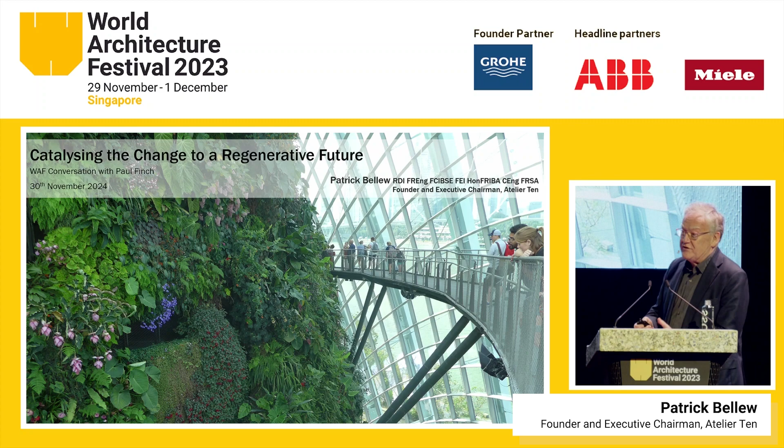So I'm going to talk about catalyzing the change to a regenerative future as a broad title. I started Atelier Ten in London in 1990, working alongside Atelier One, our structural engineers. And as Paul said, we were working in a world where, honestly, the architects designed the buildings and we put services in to make them work. And we were trying to find a way of having a conversation between architecture and engineering that improved the way that buildings were built. Now, this may seem blindingly obvious now, but back then it wasn't so much.

We've now grown to be about 350 people in 11 offices around the world, working on lots of projects far and wide. I'm just going to focus on a few of them today. But in terms of talking about catalysing change, I'll start with an anecdote about an Irish client I had, working on a project with Foster & Partners.

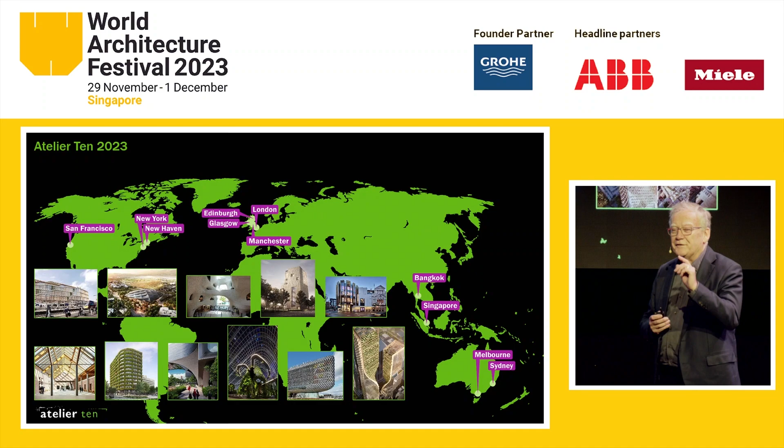And we had a meeting talking about innovation. And he took me aside after the meeting. He said, Patrick, I want to be innovative. I just want to see where it's been done before. And so you get this thing about innovation and about change that is often, you need to have people who help you to move ideas on.

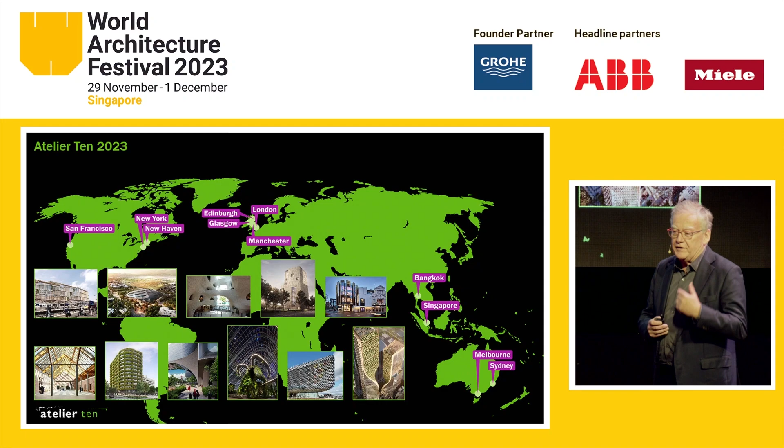And I'm going to talk a little bit about our sort of journey through gradually embedding sustainability into projects, and then about how we move what's happening now in terms of carbon and what's changing. So actually our first project in Singapore was with Michael Wilford, doing the Durian building, the Esplanade. We worked with Atelier 1 to design the shading system there.

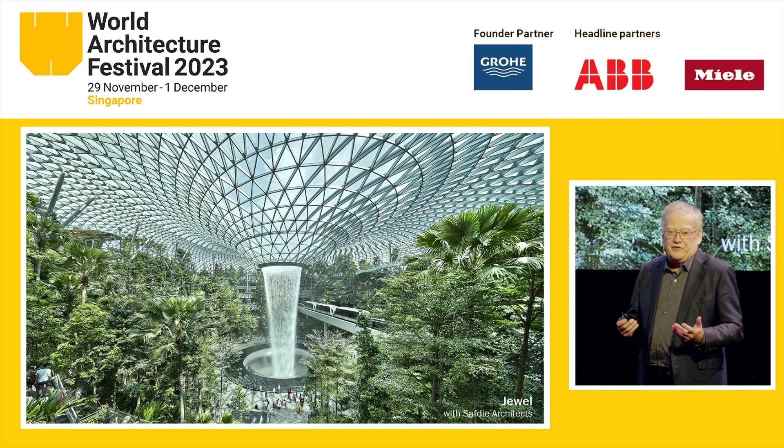The Gardens by the Bay I'm going to talk about later. We also were the environmental designers on the Jewel, working with Safdie Architects. And as Paul says, we're still here in Singapore working on things like Clarke Quay and many other projects at Sentosa. So we're very busy in the Singapore market, and it's a wonderful place to talk about regenerative design and about the future of design, because the city is all about that.

But as a business, we've had a kind of 35-year focus on operational carbon. Really, what we've all been talking about in this whole time is about operational carbon. And winding the clock right back to the beginning, we did some fairly simple little projects where we were exploring different ways of doing things.

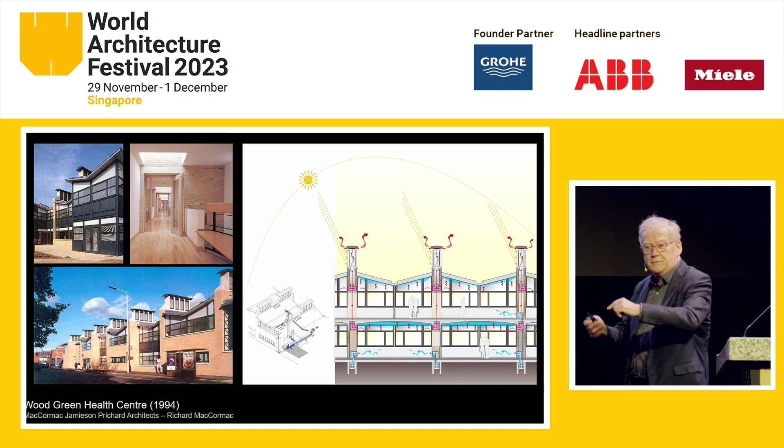This was with Richard MacCormac, a little health centre in North East London, where the whole building was actually designed around these ventilation stacks, doctors' surgeries where we could bring air in from a quiet courtyard through an earth duct underground into a little doctor's surgery. He could open a little damper and the air would disappear up a chimney and would naturally ventilate without opening the windows because it was a noisy street outside. So early explorations of natural ventilation.

Working with our collaborators of 30 plus years AHMM, figuring out how to do schools as Britain went through a phase of building schools. This was a sustainable primary school where we started to understand that actually with schools you don't want to build heavyweight buildings. You want to build lightweight buildings because schools are only occupied for a relatively short part of the year. They're very rarely occupied in the summer where thermal mass might be a help to you. So what you want is buildings that are pretty responsive, that have great natural light, that naturally ventilate very well.

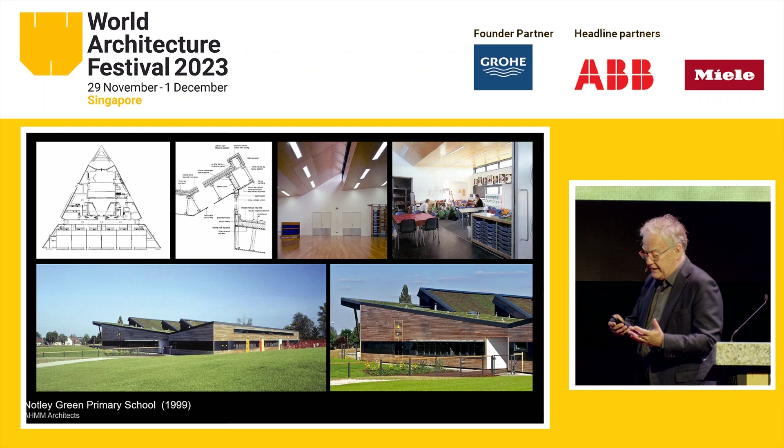And this is a really iconic little building that, I think Paul's in the audience and will remind me, I think we won about 11 or 12 awards. And the British government being what it is, they never replicated it. It's one of the most successful primary schools ever built, works absolutely beautifully. Still, all made of timber, it's completely sustainable. It's years ahead of its time, and yet never done again because of our procurement system in the UK schools business, madness.

We got into thermal mass for university buildings. This is the building with Eva Jiricna and Jon Tollit at De Montfort University. They were really into natural ventilation, and we said, no, when you've got buildings that are full of students and heat, we should be harvesting that heat through the winter and storing it in the concrete structure. So we developed this system using a system called thermodeck, where we pushed air through the concrete slabs and used that to provide our heating and cooling in a building that needs almost no other systems.

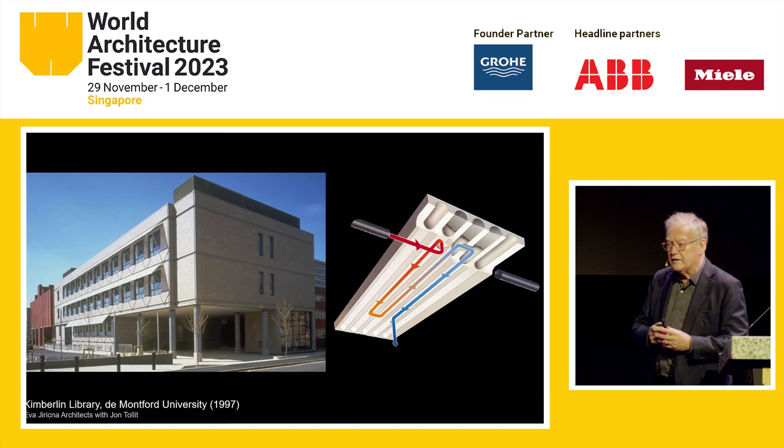I'm not going to go through these in detail. I'm just going to give you a flavor of where we were taken. We started to get into in-ground storage. So this is working with Rick Mather at the Sloane Robinson building. The late Rick Mather was a very frequent collaborator. Geothermal buildings that put energy into the ground.

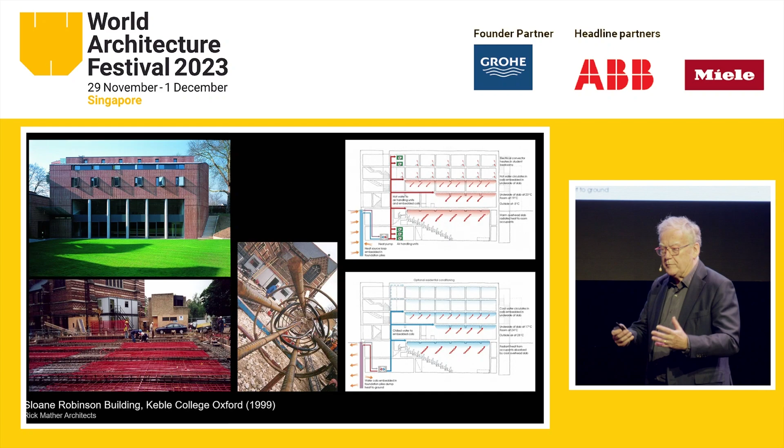And then a real transformational moment, working with Feilden Clegg Bradley. Congratulations on the Kigali win yesterday. We're working with them on that too at the moment. But this was nearly 30 years ago at a place called the Earth Centre. It was going to be the UK's Centre for Sustainability, a building by Future Systems up at the top, but the building with Feilden Clegg Bradley is here.

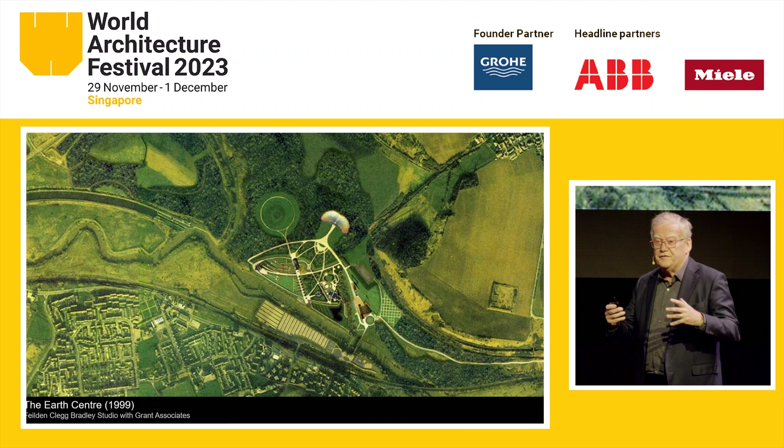The site sits on a colliery spoil heap, and it straddles two fault lines. So we were the structural engineers for its 30,000 square foot building called the Planet Earth Gallery. We're going to build a giant raft, a huge, deep raft to basically carry this building over the top.

I did some sketches which I faxed to Peter Clegg. This is how long ago it was. I remember faxing them to Peter and saying, hey, what about if we hollowed out all the floors underneath and built something that became known as the Labyrinth? Could we find a way of doing sort of the heating and cooling with this sort of underground system?

So we developed a graphic to try and explain it. It was one of our first kind of graphics that we produced at Atelier 10. And being a British lottery project, we had no money at all to do it until the day they gave us the money, and then they said, you've got to start on site in 2 weeks.

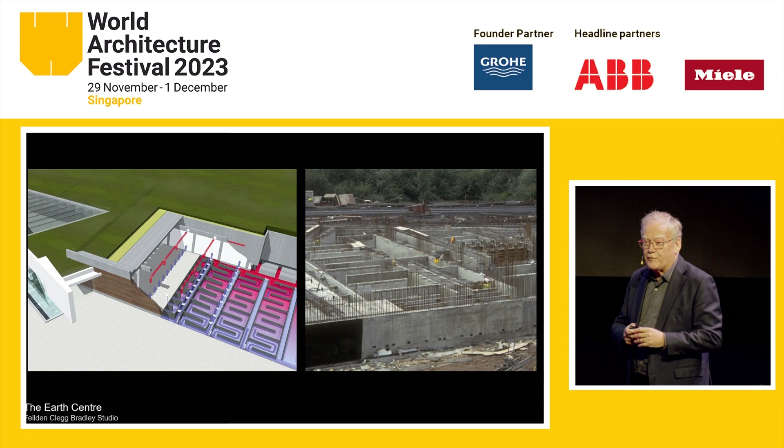So we basically looked at the client, and the client looked at us and said, is it going to work? And we'd done sort of 2 pages of calculations and thought, yeah, it'll work. So we got on and built it. And so the first labyrinth came out, and this is the innovator part of it, where you're being innovative. This had never really been done on this scale before, probably since the Romans. But it set in motion a whole series of projects that we worked on down the years.

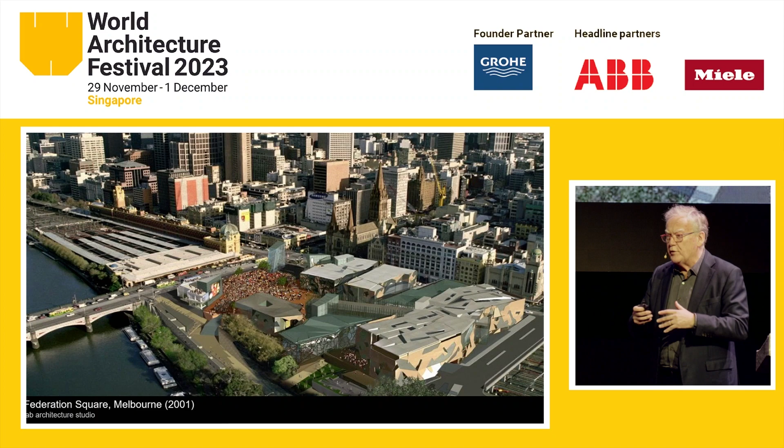So Federation Square in Melbourne with Lab Architecture Studio. It sits over the rail tracks going into Melbourne Station, and there was a big piazza here, and we had to condition a long atrium space, 350 meters long, that's got an auditorium at one end, but it's completely open at both ends. So putting normal air conditioning in didn't seem like the right thing to do.

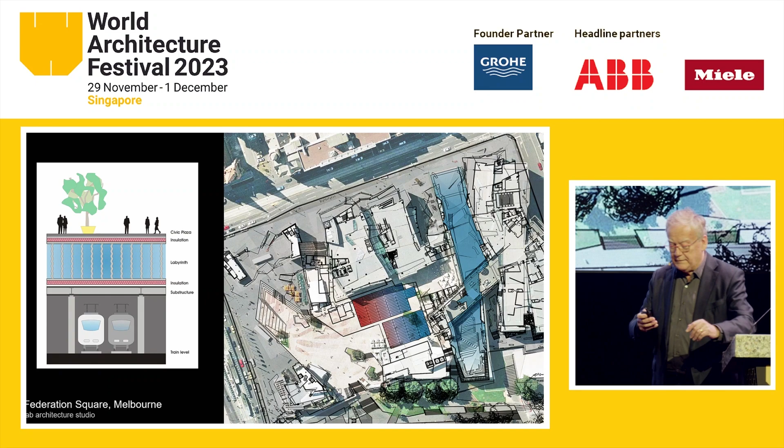So sitting over the train tracks, we had this space that was between the crash deck and the Civic Plaza. And so underneath, we postulated the idea, could we put a big labyrinth under here that could do our passive cooling? So we did. Another one that got through, the client said, yep, they funded it, and we would have had lots of materials in here anyway to hold the deck up, but we did add quite a lot more.

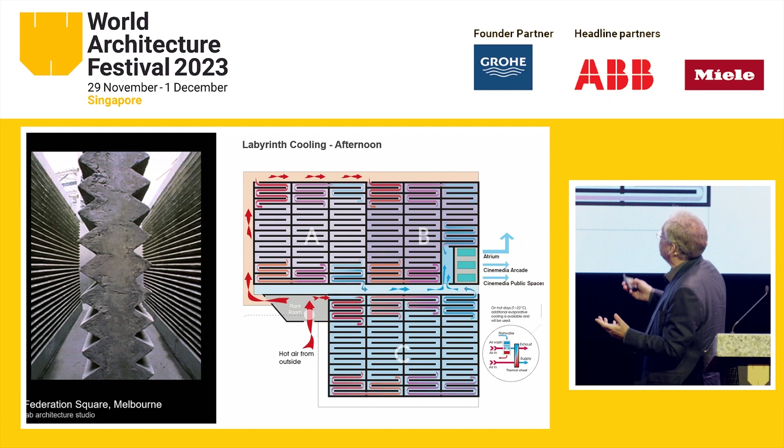The air travels about 1.2 kilometers down tunnels, and basically the idea is that we take cold air at night, so it's almost always cool in Melbourne in the evenings. Cool air basically cools down all these banks of cells. So the following day, we pass hot air through, and that hot air chills down before it comes into the space. And the resulting temperature, just a quick physics lesson, this is temperature, and temperature over time is energy. So basically what you're doing is taking the cool from the outside air and storing it in the concrete, and that gives you the ability to level out the temperature changes.

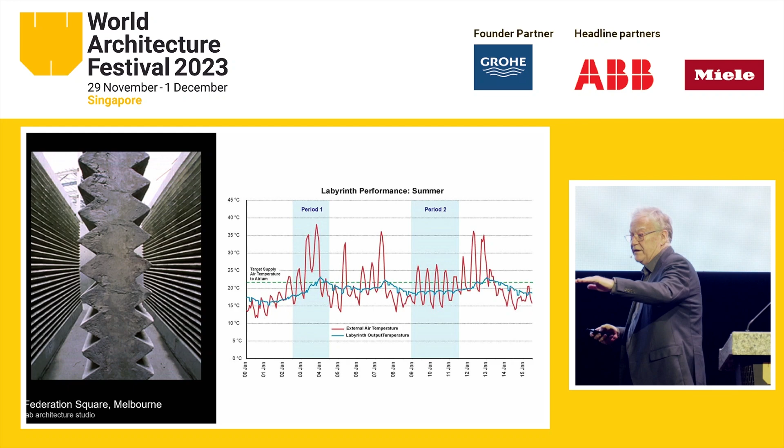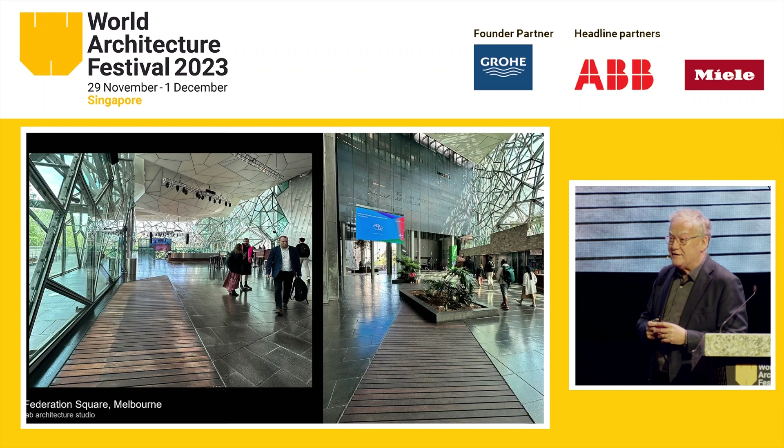I had the great good fortune to go back there a couple of weeks ago and met Peter and Don, the 2 architects, down in the labyrinth. We had a guided tour of the labyrinth with this very excited guy who manages it, who took on the job of head of facilities at Fed Square because he wanted to work on a labyrinth. He's called Colin, he's fabulous. And he gave us a fantastic tour through. I would share the videos, but I don't have time, and it's just tunnels. It's miles and miles of tunnels.

He said it's a bit like being in charge of a reactor on a nuclear submarine. There's basically nothing to do. You sit and look at it and just hope it doesn't go wrong. But so far it hasn't gone wrong, which is great. So 21 years in, climate change has made the temperatures in Melbourne quite a bit higher. But actually, this thing is proving very resilient. It still does all the cooling that we need right through the year.

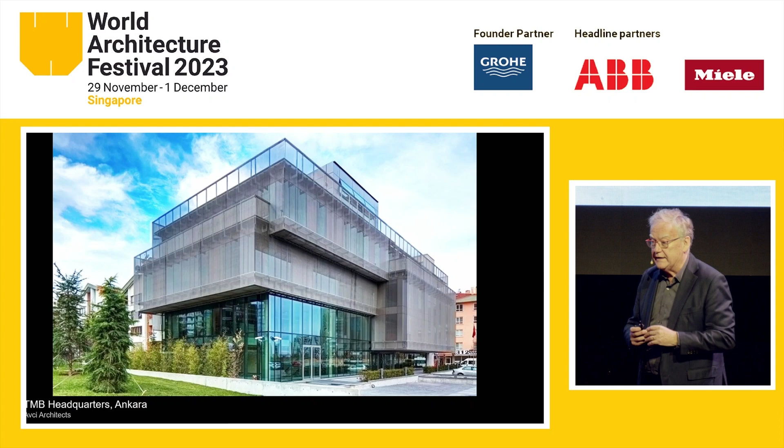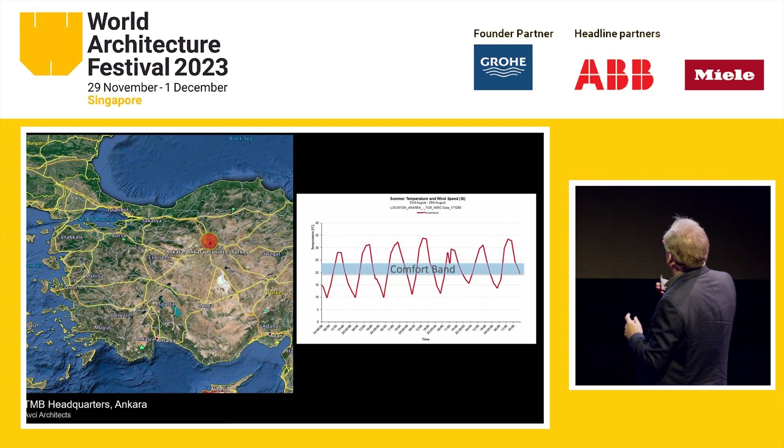We took the idea to Ankara, its headquarters building with Selçuk Avci, who I studied with at Bath. Ankara is also a place where you get these big variations in day-night temperature. And then in the middle is the comfort band, so again, energy into storage.

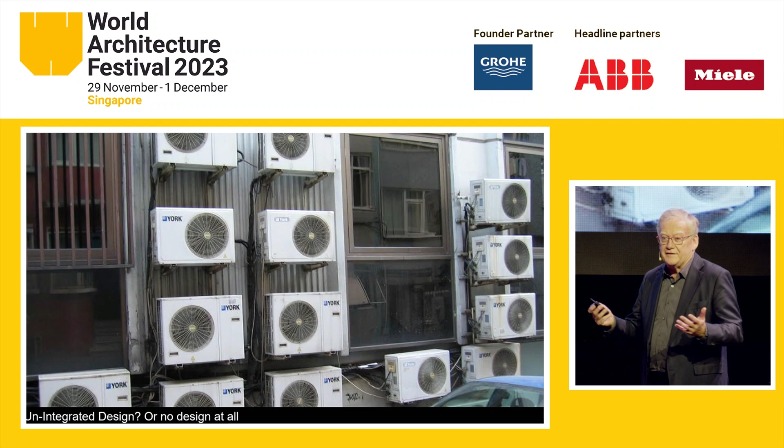So we persuaded this contractor who were building the building not to do the normal thing in Ankara, which is just to plaster the outside of the building with chilling units, but actually to build a labyrinth in the basement, to do some slab cooling, and to do all the things I was sort of talking about. And they said, it's the Turkish Contractors Association, let's build this thing.

And so we built another labyrinth under here. We put slab cooling into the slabs. And the result was, instead of a building which is plastered with refrigerant-based systems, we have PV panels on the roof that run a small blast chiller, and everything else is done with the kind of day-night storage systems. So these things are about trying to shift the way people think about buildings and building design.

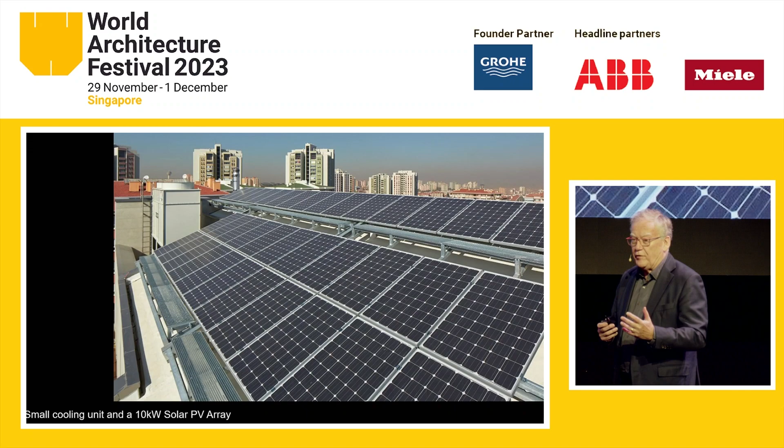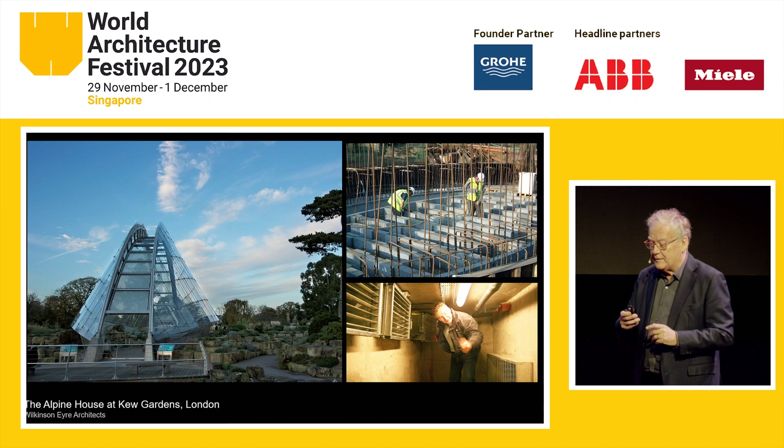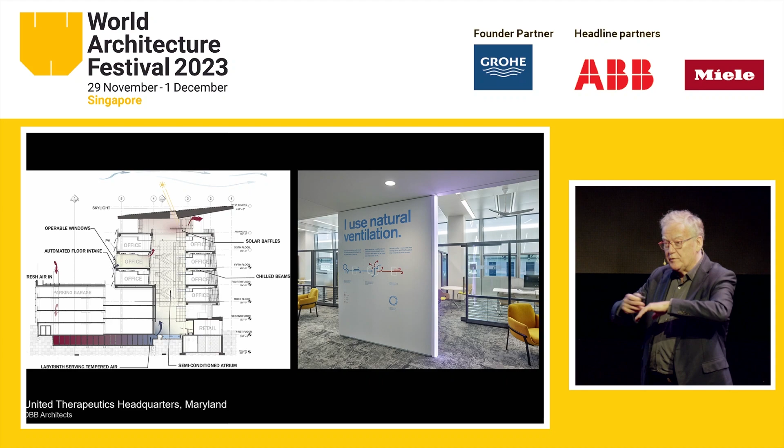And we've even done labyrinths at all kinds of strange little structures. The Alpine House at Kew Gardens with Wilkinson Eyre has a little incy-wincy labyrinth underneath, which you can just see on the top right, the guy's building. Building for United Therapeutics in Maryland, a net zero building we've done with DBB Architects, has underneath it all a large underground energy store, which basically cools the air going into the atriums. Then they open the windows and the air pushes out into the space. So this idea that started as one thing has turned into many other things.

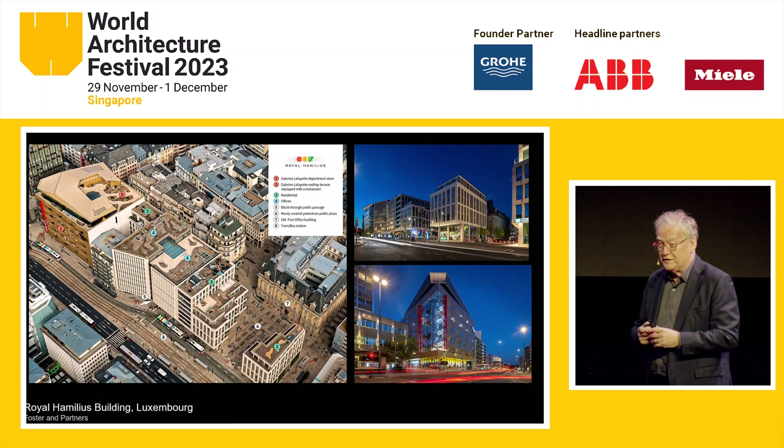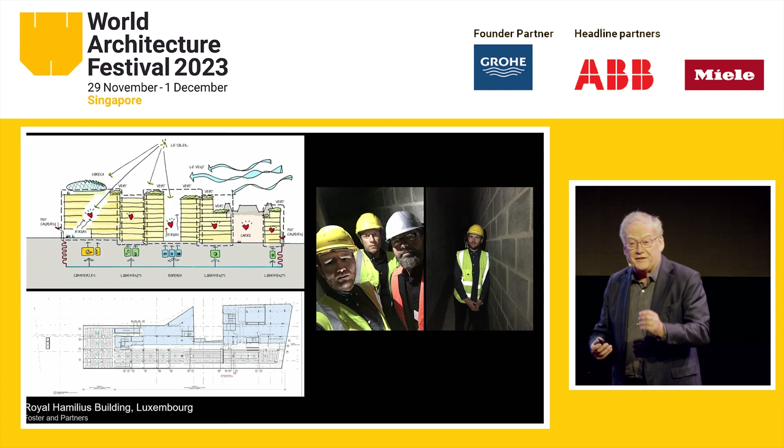They've put a big labyrinth underneath this, a whole sub-level, which is all these air passageways you can just about see on this drawing here. And some pictures of the guys from Foster's in the labyrinth testing it out just a few weeks ago as it's commissioned. So it's still rolling. 25 years later, that idea is still running. But I just use it as an example of how one can catalyze change.

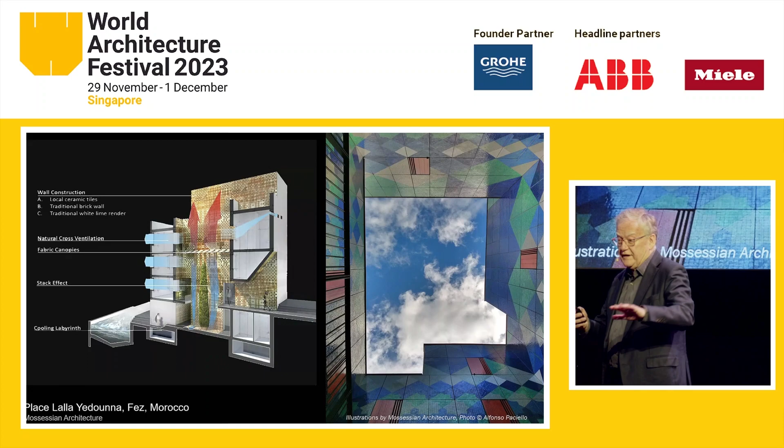Another project we've recently got photos of is a project by Michel Mossessian, the Place Lalla Yedounna in Fez in Morocco. This is in a World Heritage Zone, and we've done a sort of a rework of a big part of the souk in Fez, with some new buildings with courtyards, beautiful ceramic for additional cooling in the courtyards, but again with small labyrinths that sit underneath the buildings so that the air that comes up into the artisanal workspaces is cooled and conditioned before it comes into the space.

So all of that just gives you an idea of projects, of an idea that's grown and grown and grown and started to become part of our vocabulary, but also is highly intensive in carbon. Building these things takes carbon, and it's something we've become much more aware of as time has gone on. We've tried to do other ways of doing it.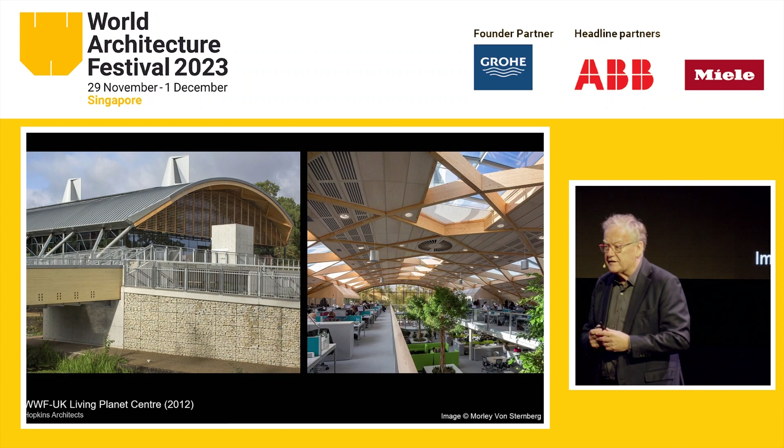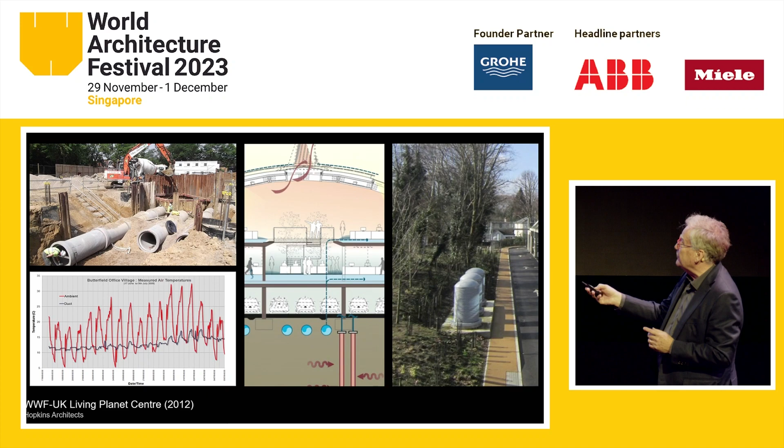So this WWF building with Hopkins in the UK a few years ago uses a slightly different technology where, instead of labyrinths underneath, we use concrete pipes in the ground. So these are called earth ducts. And these are the tubes. And so that uses the thermal mass of the ground to help us cool the buildings down. And again, we've got this graph that shows the resultant temperature: even on hot days in England, which do happen, 32, 33, we get air off the earth ducts at 15, 16 degrees. So again, free cooling, and it helps us to cool the buildings.

So this is part of the challenge: even when you drive all the loads down, the plug loads you still have in the building, running the power systems, running all those things, still need a whole lot of energy to make it work, which remains our problem.

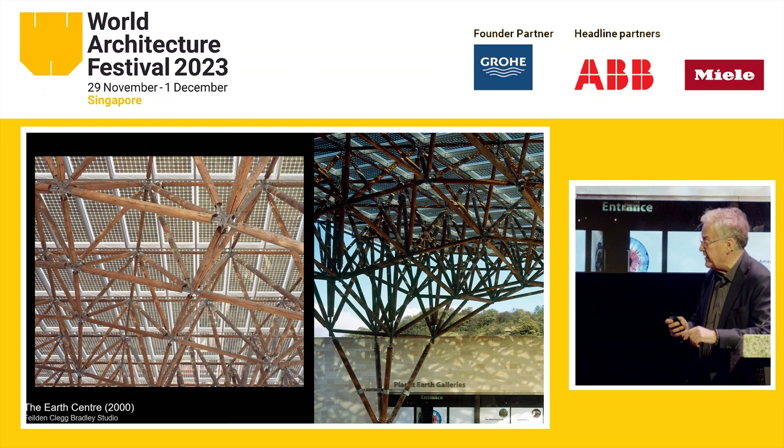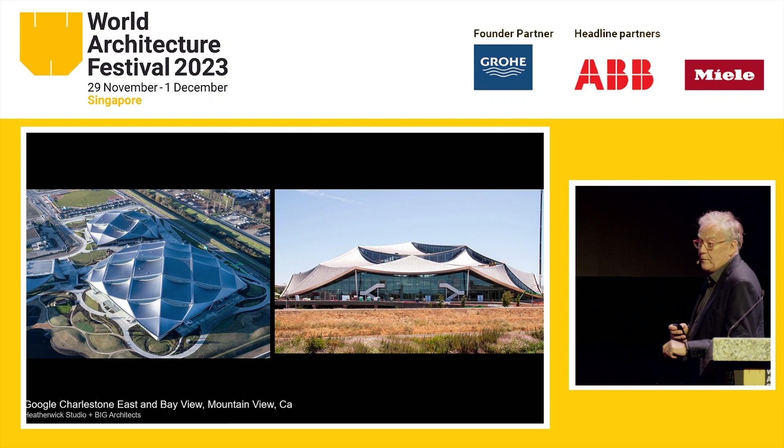And then more recently with Heatherwick Studio and BIG, we took the idea of these big domes that they have for Charleston East and Bay View in Mountain View for the new Google headquarters. And this is a completely PV roof made of shingles with a sort of 7 megawatt power station effectively on the rooftops of these buildings. So renewable energy is becoming much more a part of the question about how we integrate energy into the buildings.

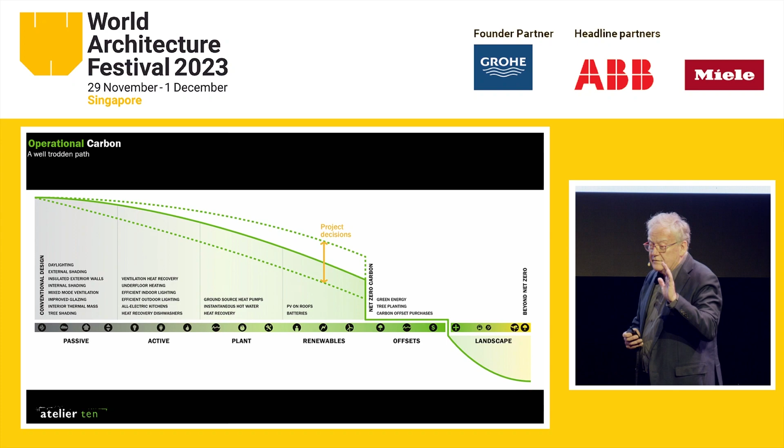So that's operational carbon. We understand the components of a journey. We've been on a journey. Operational carbon, driving carbon out is about passive design, active design, plant and kit, and then a bit of renewables, and then you get to somewhere on this point where to get to net zero, you're probably buying green energy, tree planting, other kinds of offsetting. So we kind of get all that now.

But with the emphasis on climate change, things have really, really changed. We have to wake up to a pretty big issue that faces us as an industry. The IPCC report says that urgent climate action can secure a livable future for all. But it projects a series of trajectories, a narrowing window for us to take action to reduce carbon emissions in buildings. And this graph basically shows what happens in various different scenarios, how we adopt carbon reductions in buildings.

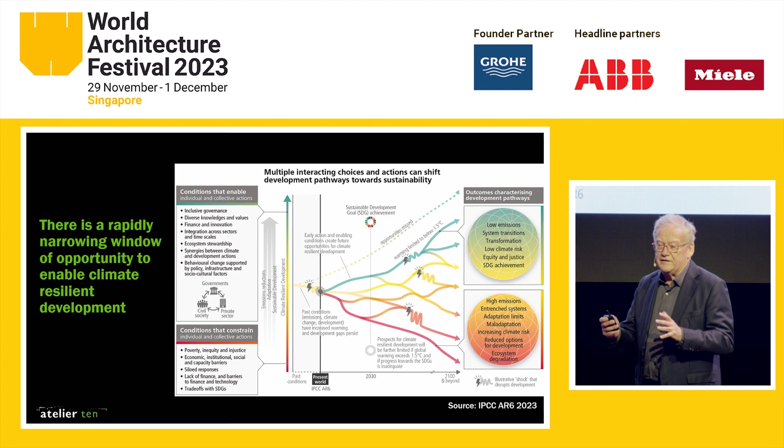2030, 2035 is our target date. This is not a long way off. And in terms of buildings, it's about the now carbon that's becoming the big issue. So the embodied carbon is the biggest story in town right now. And we don't often recognize the relationship between embodied and operational carbon in the decision-making processes that we have in building design. So embodied carbon is the carbon that's emitted when materials are made, transported, and assembled. So whether that's making cement, making steel, making aluminium, you basically produce carbon when you do that.

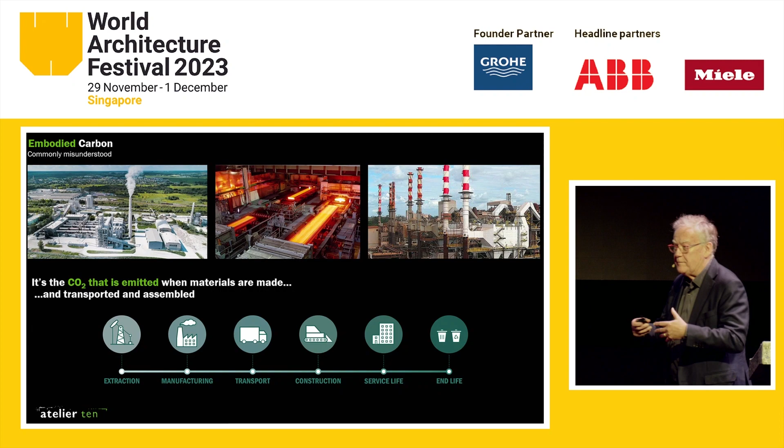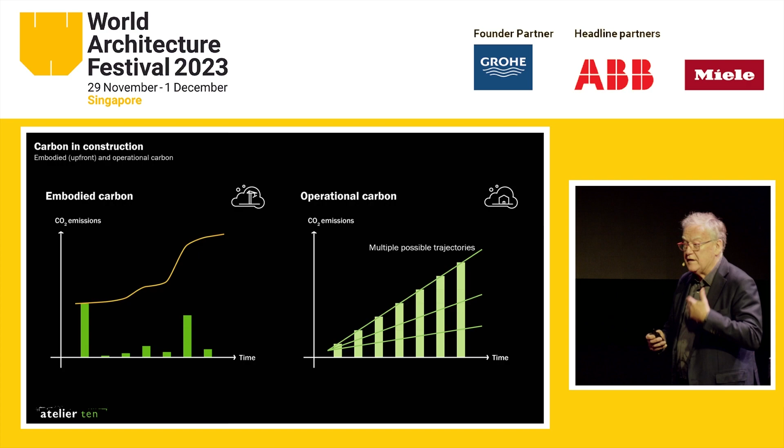You don't produce carbon when you knock a building down and crush the concrete. It doesn't give off bubbles of carbon dioxide. The carbon dioxide is made by the replacement materials that we put on site, hence the push against demolition. So if you think about the carbon over time in construction, you get these kind of graphs. So with embodied carbon, big amount of carbon up front, that's between now and 2030. Some more as you do fit-outs, maybe a big refit in 25 years. So you get a profile like that. With the operational, there are multiple possible trajectories depending upon the decisions you make, but effectively it's a longer-term game.

Now what's really changed, particularly in the UK, is our grid, the amount of carbon in the grid, which is what becomes the operational energy in the buildings. Okay? So the grid since 2013 has reduced from about 550 grams of carbon dioxide to less than 200 in 7 years. So we've had this amazing change. So if you use a heat pump to drive building heating and cooling, your carbon emissions are actually very low. Do you know that in a typical London office building, the heating and cooling is less than 15% of the total energy consumption? And yet we focus enormously on it.

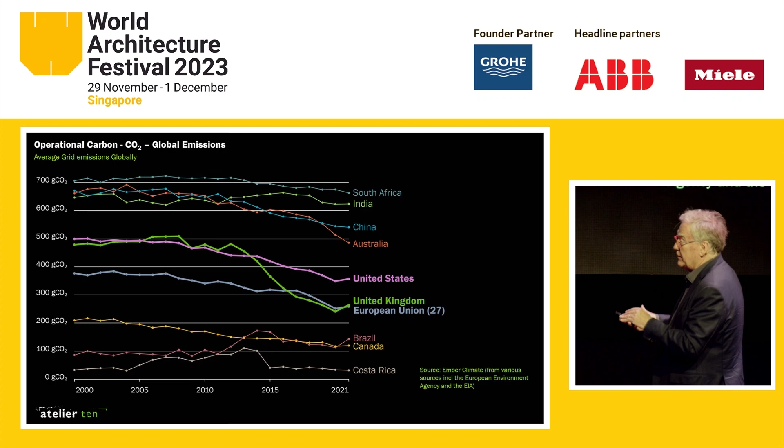Most of the rest of it, I should explain, is plug loads, and it's lifts and elevators and all those sorts of things. That's where most of the energy is going, because the HVAC systems now are so efficient and the coefficient of performance of heat pumps is so good, you don't actually use that much energy to do heating and cooling. And I feel like a complete heretic saying this, but that's the reality. And it's the same globally. We've done some research which shows the UK is running a bit ahead of the curve, but all across the world, power grids are gradually decarbonising. And that means that the operational carbon in running our buildings is going to get less and less as the years go on.

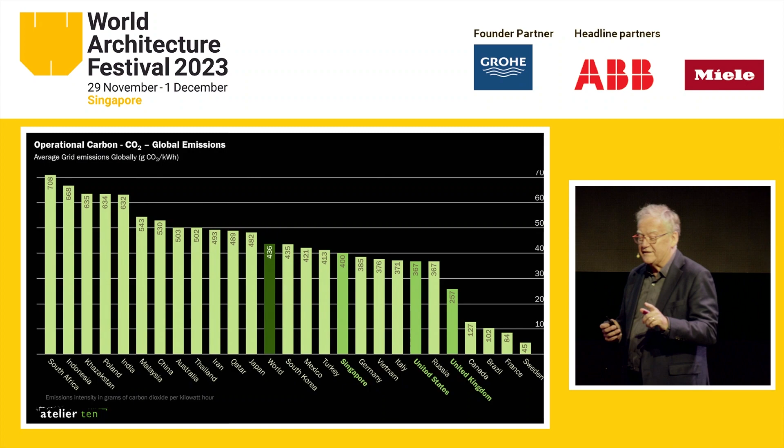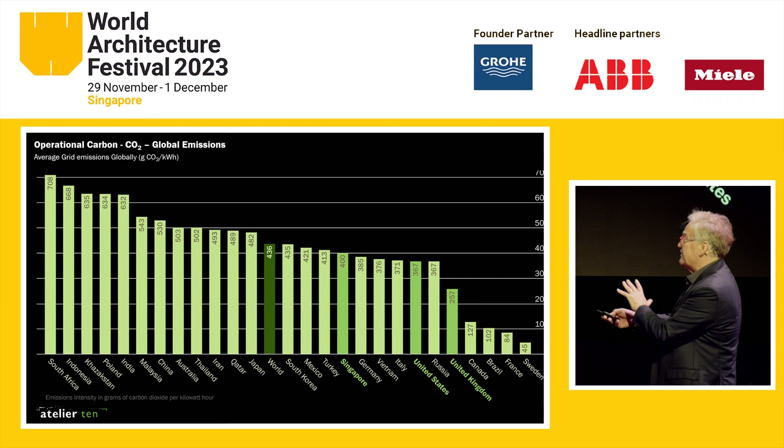Doesn't mean we should take our foot off the gas, but it means it's going to be less and less. So this is looking at average CO2 emissions globally, around 436. The UK is down at 257. So this does apply to most parts of the world. There are some parts where what I'm about to say is not so applicable because the grid carbon is still pretty high.

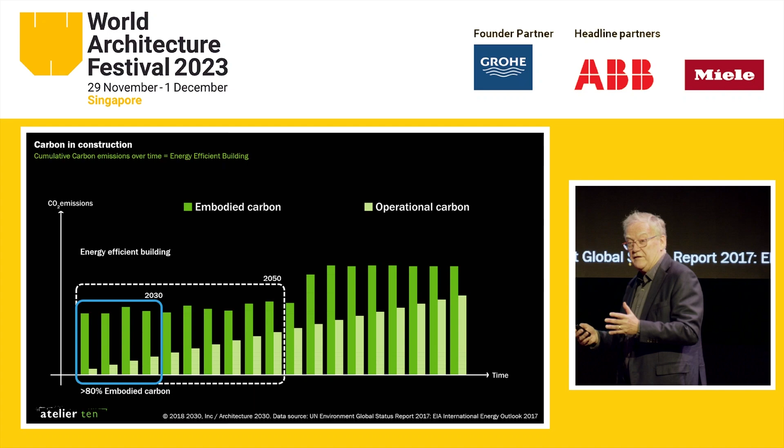I feel like a heretic standing up here and saying it, but we've got to wake up to the fact that sometimes the decisions we make in trying to save operational carbon have a huge impact on embodied carbon that isn't really recognized in the design process. And we need to understand that better.

So in the UK, what we've seen since 2019 is the RIBA Sustainable Outcomes Guide, LETI has produced a series of targets and metrics that the industry has fallen in line behind. Our mayor in London has produced guides. The RICS have produced a process that we follow now on all buildings to calculate embodied carbon. So people say, oh, you can't calculate embodied carbon in a building. You really can, and you really can use it as a basis for making design decisions.

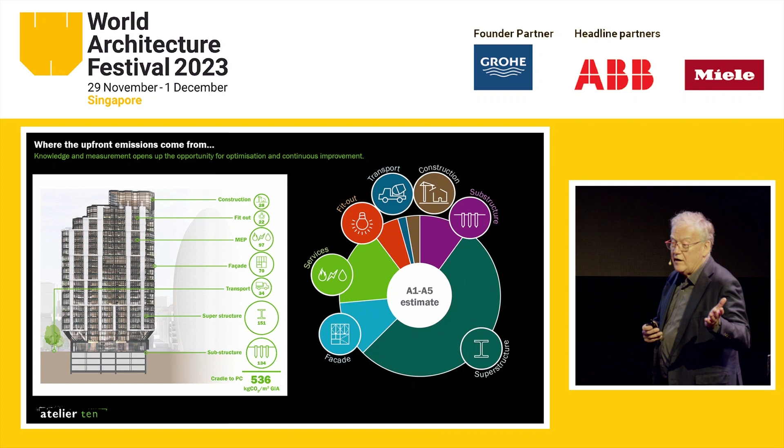So in a typical building, we know where the upfront carbon is. We know that there's a lot of it in substructure, superstructure, transport, facade, and so on. We're working a lot with Albert and his team at AKT, among many others. We've been looking really hard at this embodied carbon. This particular project was one we did with Albert's team.

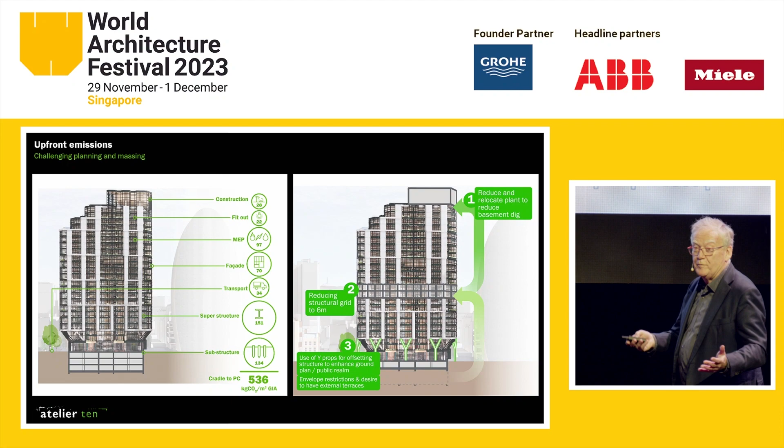And once you know where the carbon is coming from, you can start to make decisions. Do you reduce the basements? Do you move mechanical plant? We build huge basements to put bicycles in London for transport carbon. We've got to start questioning some of those basic fundamental decisions because the carbon impact of that is really high.

Challenging brief and codes is vital. When we first started designing Gardens by the Bay in 2010, the standard roof loading design for Singapore included snow load, because it's a British standard. So it has 0.5 kilonewtons per square meter across the whole roof, which, when you put it across the roof of Gardens by the Bay, was thousands of tons of snow the roof was going to be designed for. So we managed to persuade them to change the codes to accept a reduced snow loading.

But typically we design London office buildings with floor loadings that are designed for a lawyer to have floor-to-ceiling stacked rotary filing shelving, which never happens anymore. It's all digital. You don't need the kind of loadings we put on floors in buildings, and yet every building has them. So is that real occupancy? Is that what we're designing for? Stillage sitting on the floors, or that many people every square meter. So structures are inherently over-designed because of the way that we're briefed. We need to start asking some of these pretty fundamental questions.

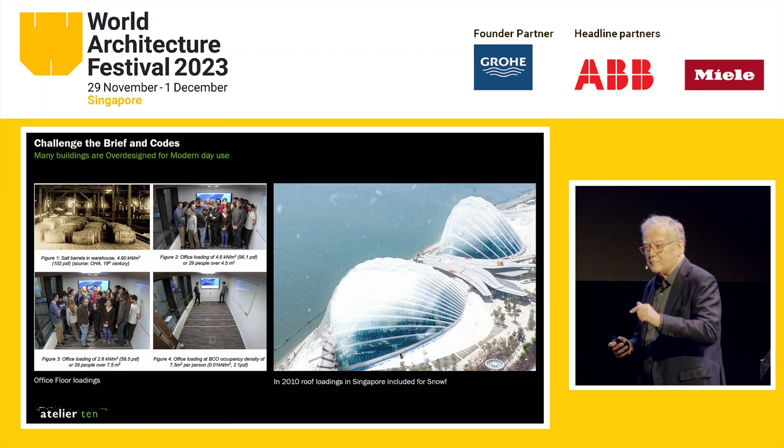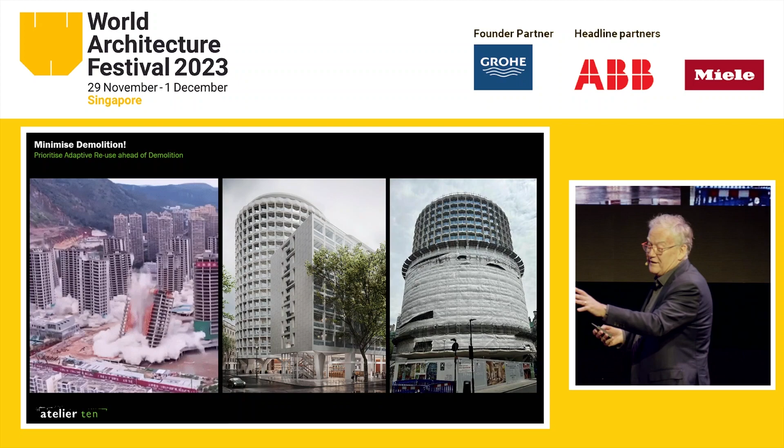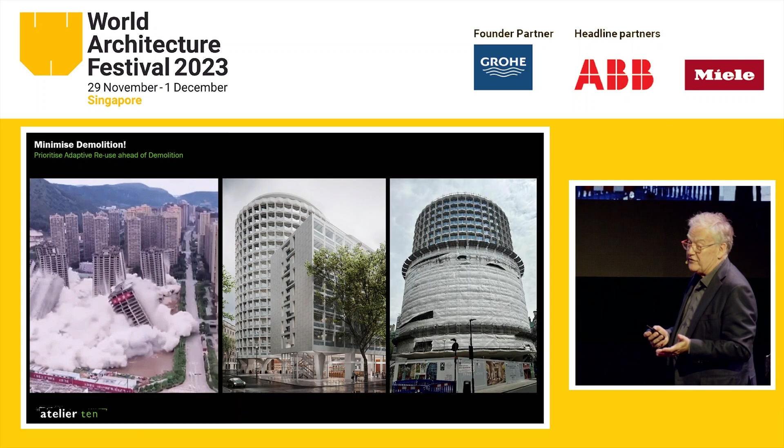So, basic rule book. What are the things we should try and avoid doing? I love this GIF of demolishing buildings in China, so I couldn't resist. So minimizing demolition is a big part of it. On the right there is Space House, a Richard Seifert building we're doing in London just now, which is being refurbished. So minimizing demolition and prioritizing adaptive reuse is clearly forefront.

Minimizing basement construction is a big deal. 25% of the carbon in a building is often in basements. We don't even think about it. We just dig big holes and fill them with concrete and steel and all the temporary works that go with it. So minimizing basement construction is something we need to be talking to our clients about. Structural grids, and again, thanks to AKT for some of this data: if you move from a 12 by 9 to a 9 by 6 grid, you can save something like 20% of the carbon just like that.

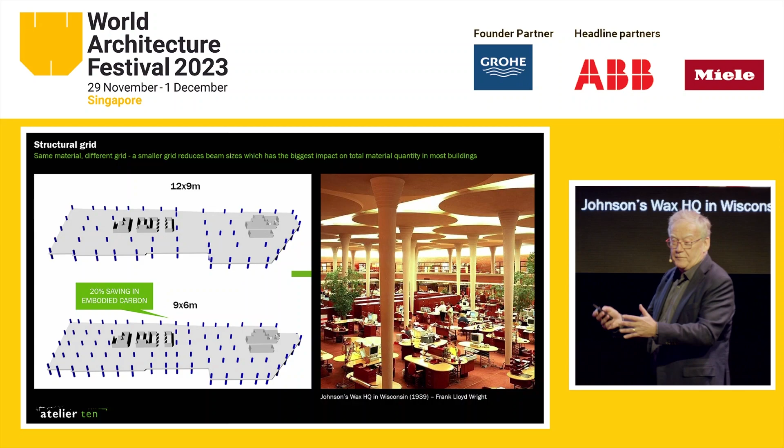Now, nobody ever died from walking into a column. You just walk around them. Very straightforward. So, column grids: they don't want columns in the way in office spaces, but you can make office spaces work with smaller grids. Frank Lloyd Wright made it work. It's possible. Architecture can make this happen.

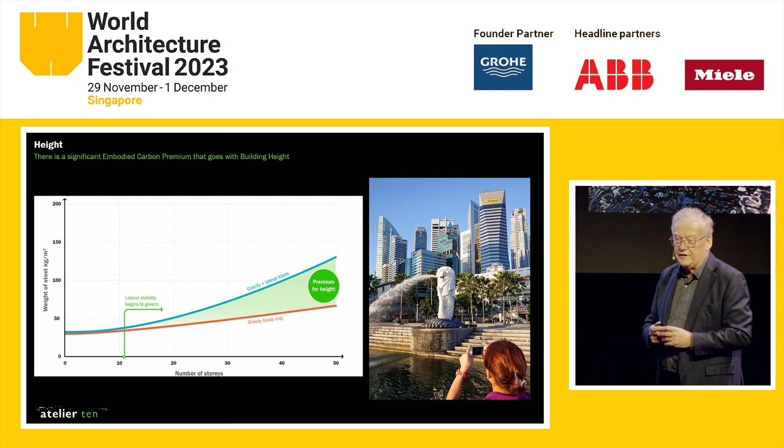Height is a big deal. In Singapore, this is a big story. The taller you go, the more you're resisting sway forces, the more carbon you're going to use to build it. And as the buildings get taller and more slender, the form factor, the facade carbon, starts to take over as a very big driver. The material choices, clearly, whether you're using steel, concrete, or timber, make a big difference, and that also then relates to the grid, so there's lots going on there.

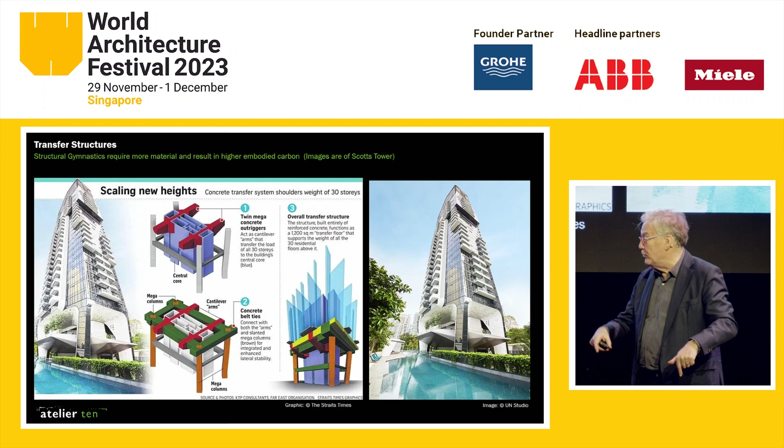Minimizing transfer structures. Singapore loves a good transfer structure. They're incredibly energy intensive. You only have to look at most buildings in Singapore when they're being built. About 5 floors up in the air, you'll see some huge transfer structure transferring down onto 4 enormous columns. Stop doing that. That emits a huge amount of carbon.

And finally, dare I say it, cantilevers. Cantilevers are, please don't put this in the press. I'll get in such trouble when I get this done.

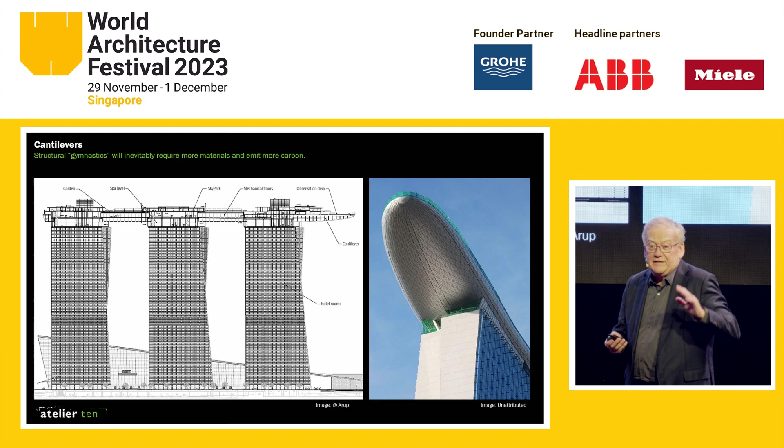So when you build a big cantilever, it does involve an awful lot of material. Whenever you're defying gravity, you're going to be using a lot of material. So these are the things we're learning. These are the toolkit. MEP systems: we put such complicated MEP systems in to minimize carbon emissions in operation and don't recognize the embodied carbon in them.

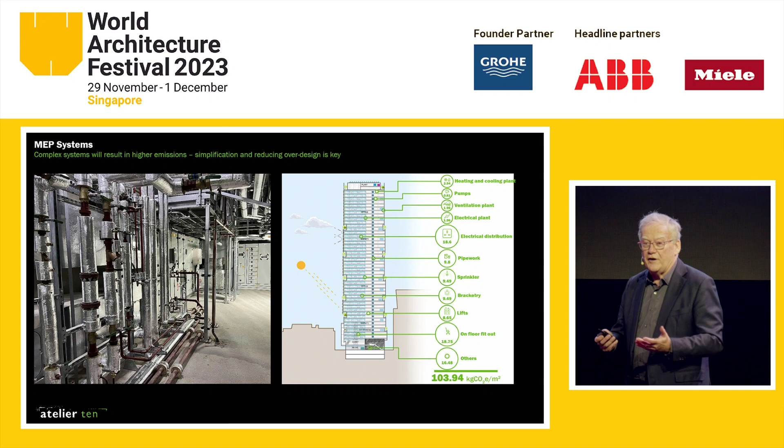So one of the reasons for showing some of the early projects that we did, they were all really simple. We built really simple buildings, really simple systems, and now we make hugely complicated systems to try and reduce operational carbon. We're having to completely rethink that. We have new processes to drive carbon out. These waterfall diagrams are standard fare on most of our projects now, where you start at a target, and you've got a moonshot goal that you're trying to get to in terms of carbon, and you look at all the opportunities for driving carbon out of the project. This is a new form of process.

Some of our clients, British Land in the UK, for example, have their directors' executive bonus scheme linked to the average embodied carbon of the projects they're building. The number they have is 500 as their target. They get additional bonus. Nothing focuses the mind of senior executives like a financial incentive geared to embodied carbon in their buildings. These are the sorts of things that we need to start to see changing.

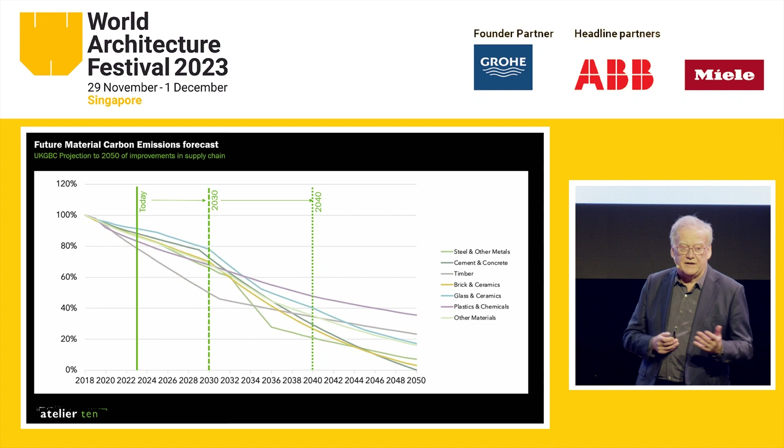We're also seeing the industry change, and we have to recognize the fact that the steel and concrete and aluminium guys are all focused on reducing carbon. In fact, British Steel, in a press release from a couple of days ago, announced they're spending 1.25 billion to decarbonize their steel operations. So we are going to see this changing over time, but we have to put our foot on their throats to keep them focused on this.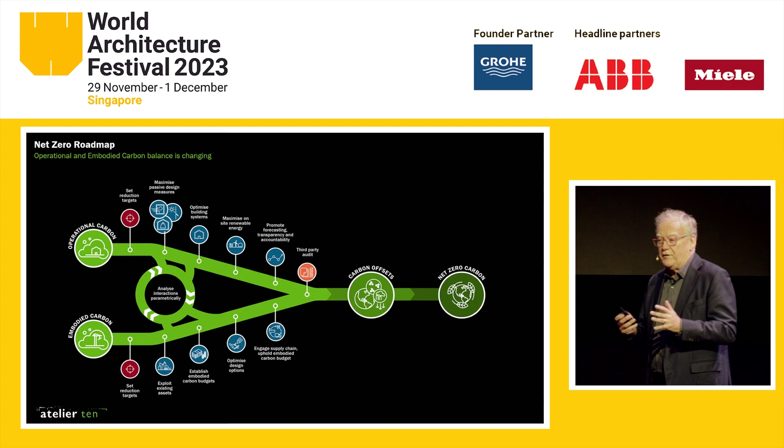We have to recognize as designers that there's an enormous interaction between the two fields. It's not two linear processes, they're two interlinked processes, and we have to start using that as a key design driver in the way that we're thinking about our buildings in the future, because we have to drive the embodied carbon down. This has been around as an issue for a long time, but we need to fix it.

So once we've got there, my talk was supposed to be about regenerative design, but I've rather waffled on about carbon. But once you get to this, this is a diagram that talks about regenerative design. What we've been doing for the last 30 years is just trying to figure out how to be less bad. The next question is, how do we start to be better? How do we start to improve and restore living systems? How do we start to be more regenerative towards the environment?

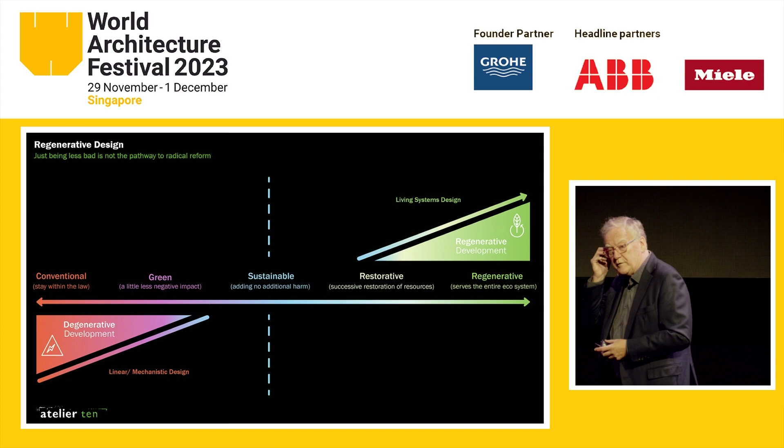And this is where it can get a little soft and fuzzy around the edges. It starts to make us as engineers start talking about a web of life view, about weaving nature's wisdom into the things that we do. This is a different way of thinking about design that's far more focused on nature, ecosystems, biodiversity, holistic impacts.

We've been talking about it a long time, but we tend to talk about it in these streams of thought around operational and embodied carbon. And we've got to basically get in touch with ourselves and start to ask the question, am I healing or destroying life with these decisions or actions? So that's a big part of what we're starting to try and think of doing.

And in reflecting on this talk, I was thinking, Ken Yeang has made a career in bioclimatic design. People didn't take him terribly seriously for a long time. But he's produced some absolutely amazing bioclimatic buildings around the world, and he's a really interesting character in that he was almost the daddy of bioclimatic buildings.

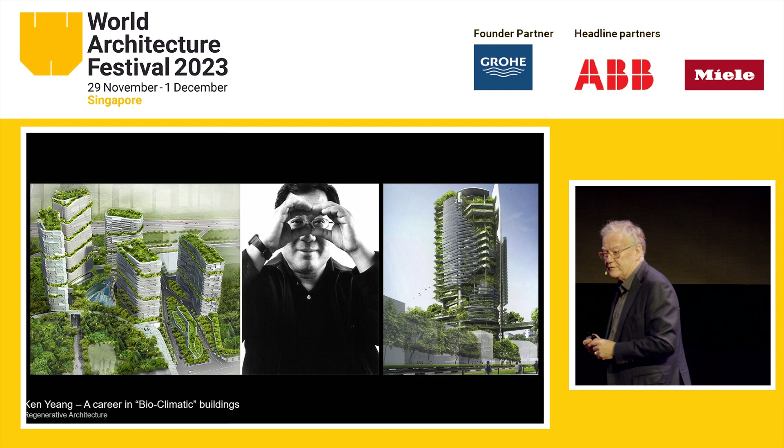So finally, I just thought I'd tell you a little bit about Gardens by the Bay, because we're here, and it's a great example of, I guess, regenerative, holistic thinking in the way that buildings are designed. So it was an international competition that we entered with Wilkinson Eyre and Grant Associates. Actually, the landscape team was led by Andrew Grant.

The gardens are based around a pattern. If you do get a chance to walk around, you'll see that it's actually based around the structure of an orchid. So the theme gardens are on the nodes, which is how an orchid grows.

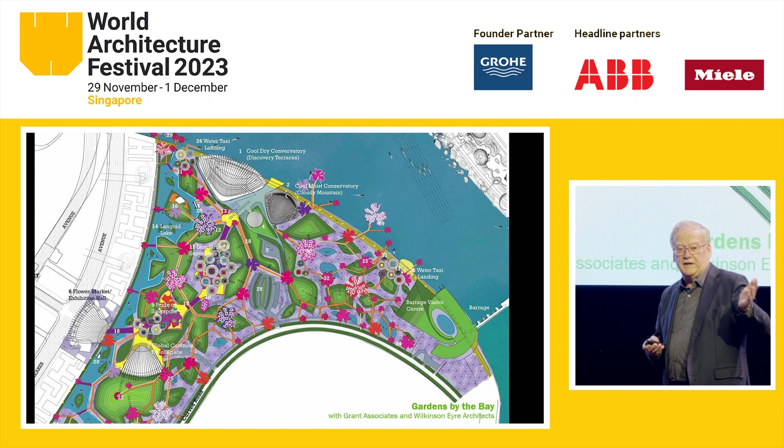You've got the supertree groves and then the two big glass houses, which were put on that part of the site in terms of master planning to minimize the shadow that will be cast by Marina Bay Sands onto that part of the site, because the towers cast quite a big shadow across the site. And we were very concerned about daylight for the plants. So that's the general layout of the gardens with the glass houses to the left.

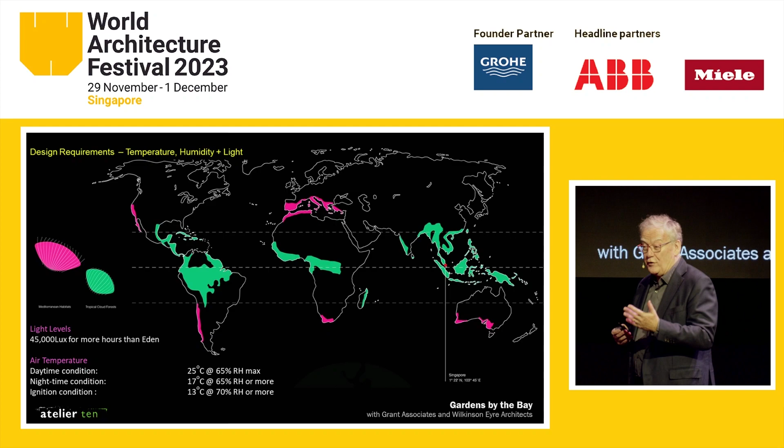Our big challenge as designers, there were a lot of challenges, but the biggest challenge in the early days was about light. So the plants to thrive need around 45,000 lux for more than 500 hours a year. Now, an office building would be 300 to 500 lux. So 45,000 lux is a huge number in terms of getting light in.

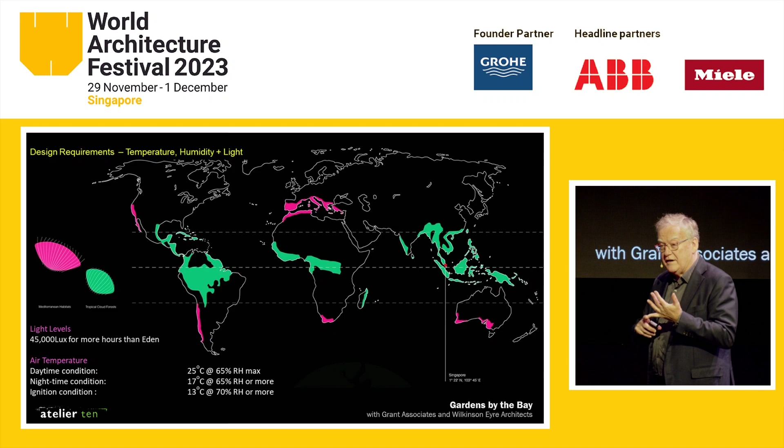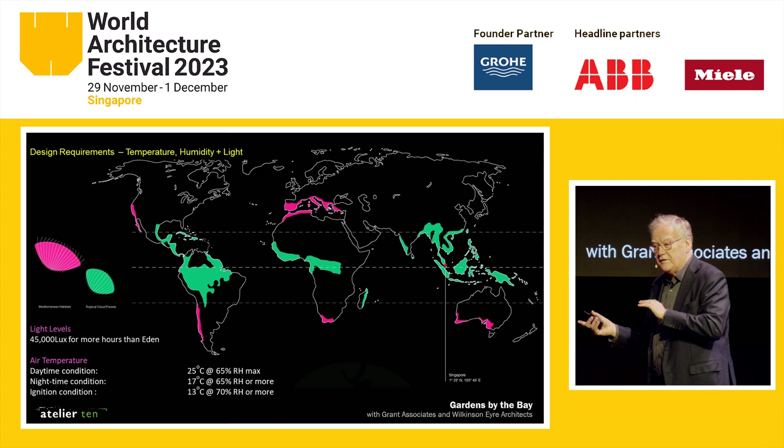We also need to run the glass houses with daytime conditions, which are human comfort levels, but also plant comfort levels for European and tropical montane plants. But at nighttime, we cool the building down to give them a day-night cycle. And then what we call vernalize them, where we cool the glass houses down to 13 degrees centigrade every night for a month, about every 4 or 5 months, which makes the plants think that winter is coming. And so they will produce flowers and actually live in the glass houses, because these are permanent collections of plants. So we need the plants to go through all the motions.

So we did so much work around the design of the lighting, working with Atelier One, working with Matthew Potter, who's here in the audience, with Paul Baker at Wilkinson Eyre, trying to absolutely optimize the structure to maximize the amount of light coming in.

And the solution is actually a propped grid shell. If you go look at the building, you'll see it's a grid shell, and the steel arch that goes over just stops the grid shell from moving. So the big arch is not actually holding the roof up. It's just restraining the movement in the grid shell. And that absolutely minimizes the amount of material so that as the plants look up, they see a lot of sky.

Now, I should just say that the issue in Singapore is that you only get 10 to 12 hours of daylight, as opposed to Europe, where you get 18 or 19 hours of daylight on a Greek hillside where you're going to put olive trees. And you get clouds and smog for about 40% of the time as well. So the natural daylight's not great.

We developed a shading system for the outside, again with Matthew, to help shade the buildings at certain times. I'm going to zoom through this because there's a book available outside.

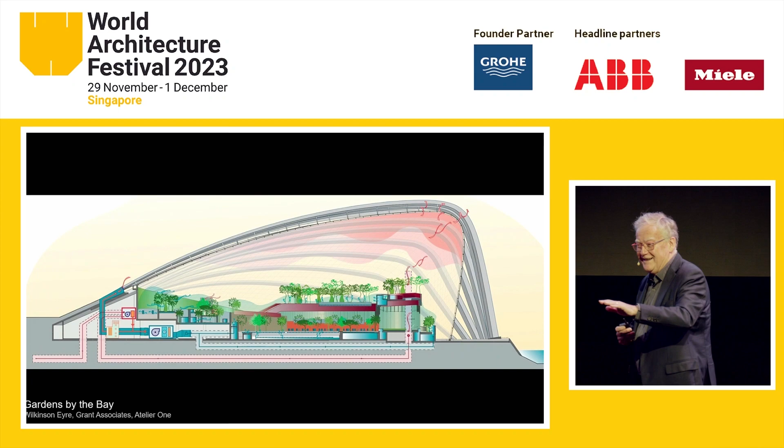But we basically integrated in, there's a lot of pipe work integrated into the floor, which basically soaks up the solar energy. The trees and the plants soak up about 60% of the incident energy, turn it into chemical energy, and distribute that through photosynthesis. And then we have an air system that blows air across the floors.

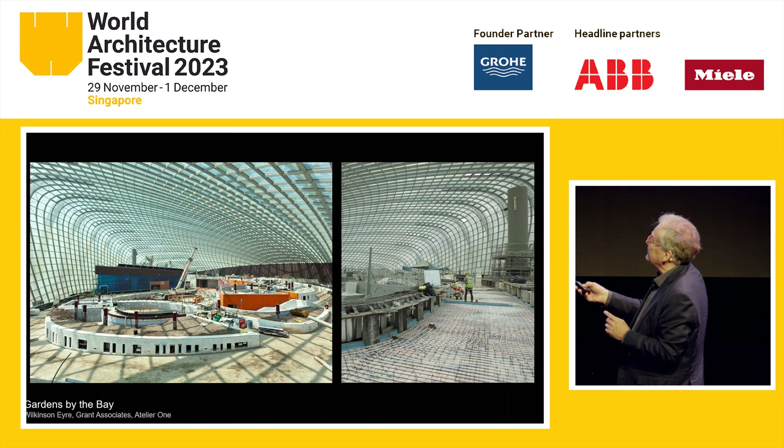The little rectangles you can see on the left-hand drawing here bring air into the space and spread it across the floors. So we only condition space where we need to. And then at the back here, you'll see this big snorkel, which sticks up, and that's the kind of return air shaft that takes air back down to the mechanical room.

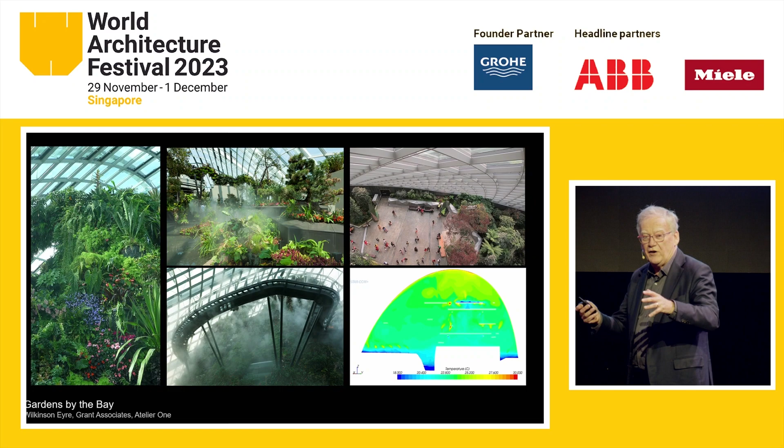The big moments on this, and I'm going to zoom through these, go and see the gardens if you're here, if you can. It's amazing. Try and get there when the mountain conservatory has got the foggers going off, because the misting system turns it into this kind of wonderful tropical wonderland.

We have about 12 big articulated lorries of wood waste arrive every night into the gardens. They go into a chipping plant. They've been chipped, and they go into a big boiler, which generates heat, and one of the supertrees has a chimney in it. That heat drives a turbine that makes power. The waste heat from that goes to absorption chillers, and the waste heat from that goes to a desiccant regeneration system that drives the dehumidification and cooling. So the entire garden is run on a kind of circular economy concept from waste products from Singapore.

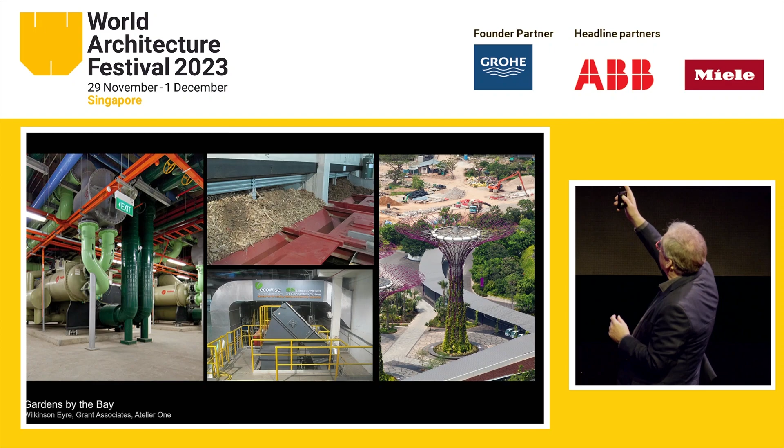So it's a great story, and it's been a great project to be involved with. So that just shows you some of the kit, which is pretty hard to see, but in the top there is the wood chip that basically runs the whole building. And it's an astonishing project, and one that we thoroughly love doing and have really enjoyed the recognition that's come with it.

So I just leave you with this thought. Back to my story about embodied carbon. You know, we know how to do this. We just need to figure out as an industry how to deliver it and how to make it a consistent approach across all the projects that we do.